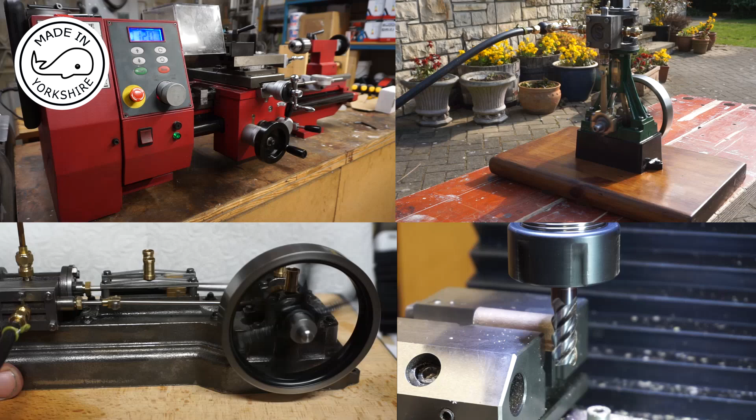Hi there, in this video I'm going to machine the flywheels for the Jerry Howell Farm Boy engine.

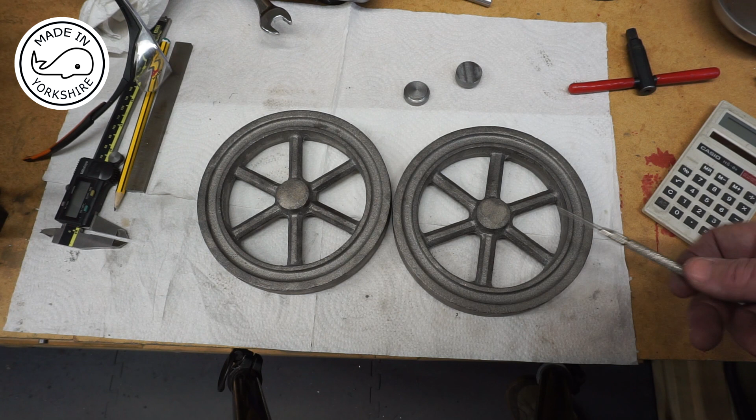The flywheel castings I got off eBay in the UK, and the seller is called Pedal56, recommended by a couple of people that follow me, so that's much appreciated. If you search eBay for Pedal56 it probably won't appear, so you've got to search for things like model engineering flywheels for steam engines, and eventually you'll find him.

These are very close to specification for the Farm Boy, and the only major difference is the hub on the Farm Boy sticks out slightly, which these castings don't. So my plan is, I've made these pieces out of mild steel, and the idea is to cut a recess and stick these in with Loctite 638, then machine them to spec.

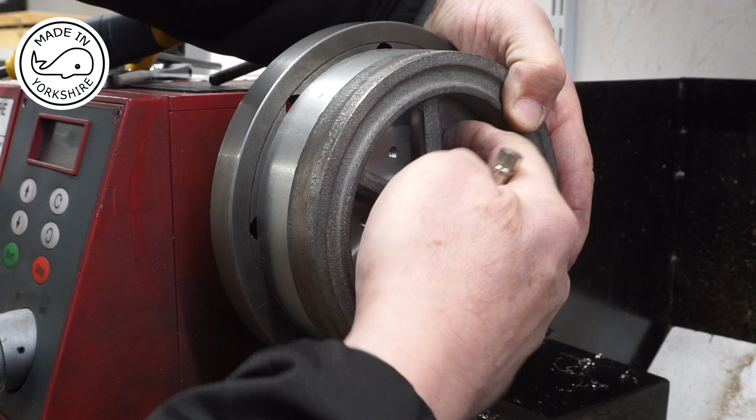I had been hoping to use this back plate to hold the flywheel, but unfortunately the holes in the back plate don't line up. So I've made this adapter plate out of aluminium and attached it to the back plate. It's running very true, and the idea will be to fix it using some kind of bolting mechanism, which will allow me to machine it.

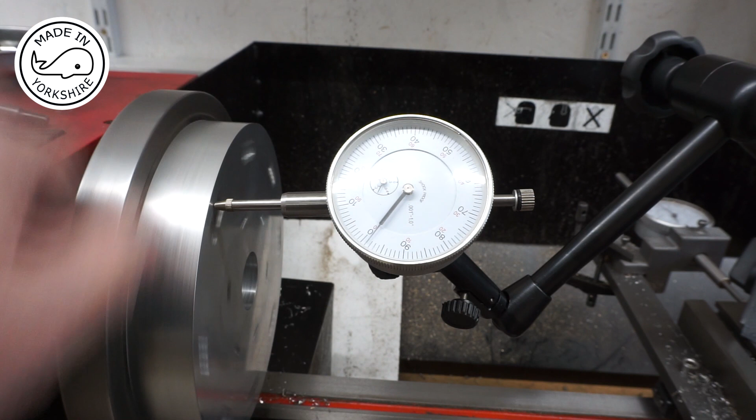Pretty close. It's about 6 thou out, but I think that'll be okay.

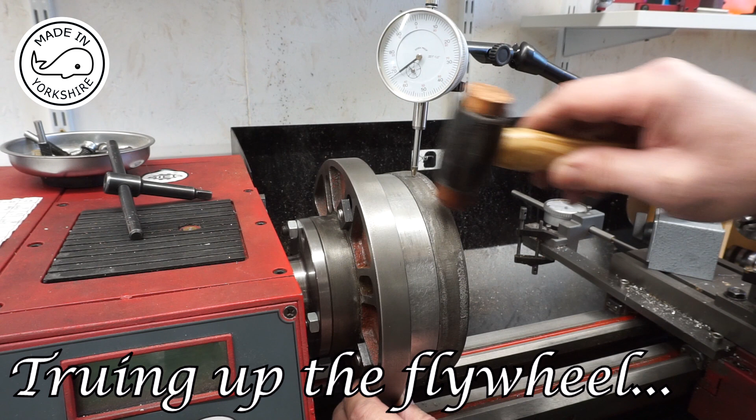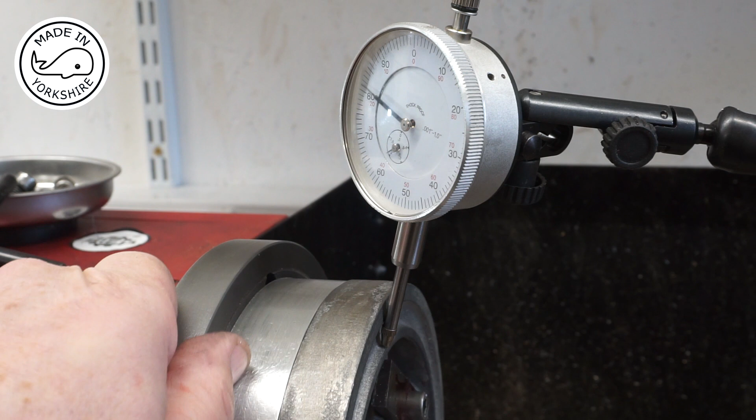I'm just checking the inside rim here. Within about 15 thou, but I think that'll be okay.

So I've set the carriage stop so I can't go beyond that. The tool will just pass the edge of the flywheel, making sure I've got clearance on these screw heads, which I have.

I'll turn at the slowest speed, in about 5 thou increments initially, see how we go. This is just running at 100 RPM, and I'm just using the manual carriage feed.

Well, this is going to take a while, but it's just a matter of being patient. I'll get back to you a bit later on. So I've just put a new tip on, and I'm running on fine feed now.

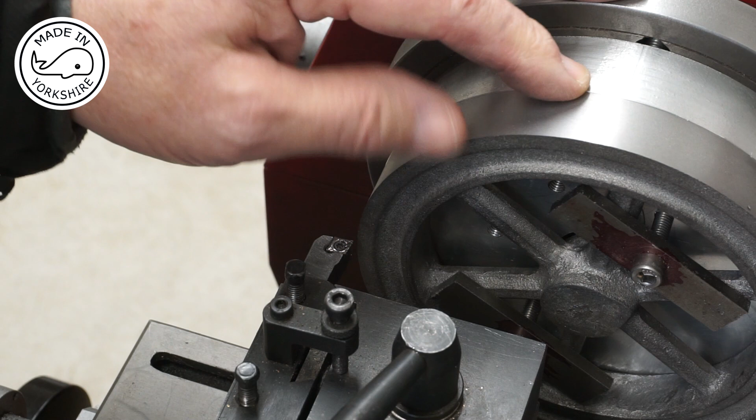The drawing says the width of this flywheel should be 0.8 of an inch, and it's already 0.79, so I'm just going to lightly skim it and get a finish on it.

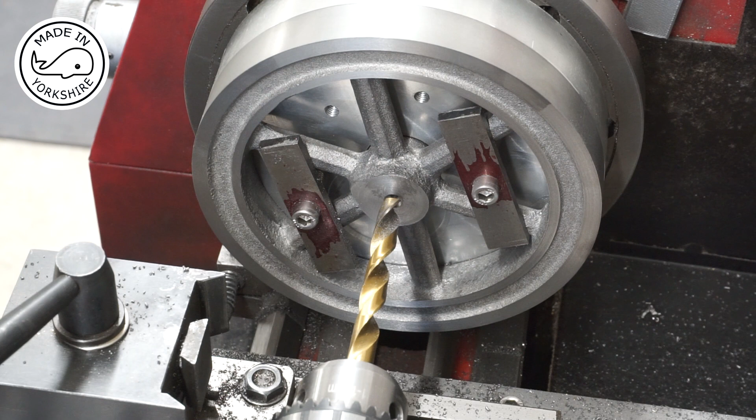So I think my priority now is to drill and ream this to 3/8 of an inch. This is a 23/64 drill bit, and I've already centre drilled.

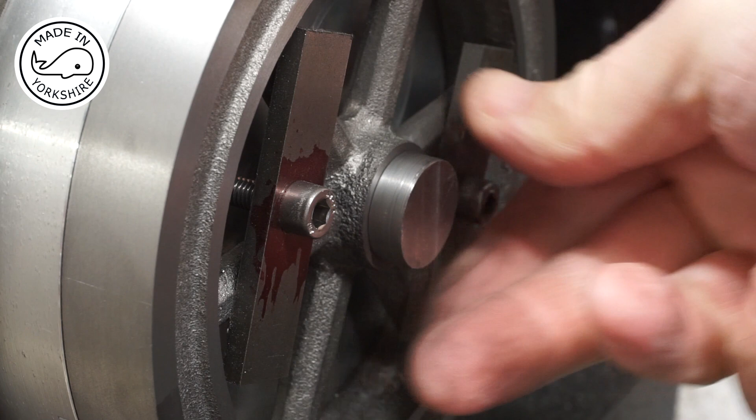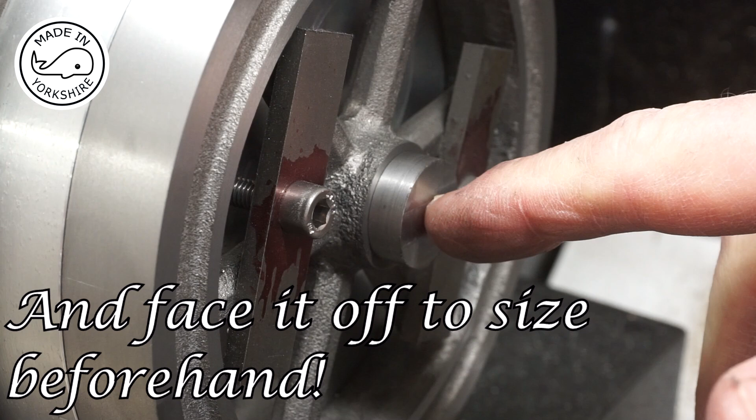Well, this seems to have turned out okay. So what I'll do is Loctite that in place, leave it for a while, and then I'll drill and ream to 3/8 of an inch again. But I'll do that bit off camera.

So all I need to do on the lathe is switch it round and face the opposite sides on these edges. Again, I'll just run this at the slowest speed.

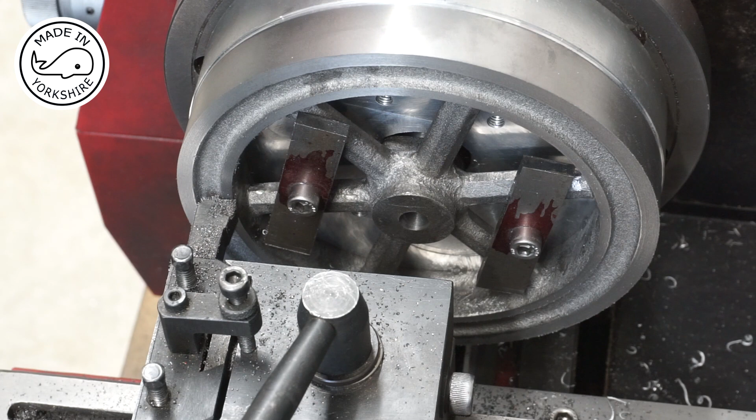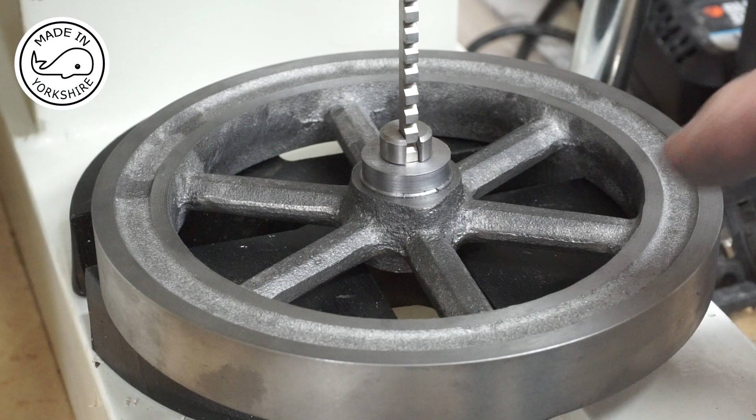Now what I did off camera on the lathe is I reduced this inner rim down by about 63 thou from the outer rim, and I thought before I put it on the rotary table on the mill I'd broach this keyway. It's 1/8 of an inch keyway, and this is the first time I've broached anything, so it should be fun.

I decided to broach it from this side because that's where the mild steel is, and if I did it from the other side it might pop that out. Maybe, I don't know, but it seems to be the safest side.

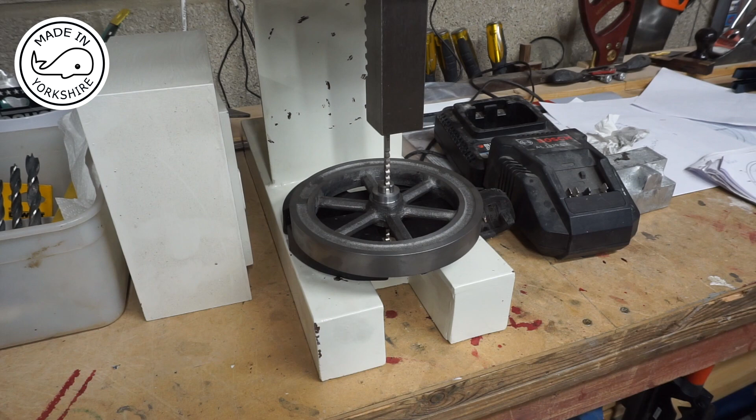Needs a bit of pressure. Just to give you an idea of the setup, it's my 2 ton press.

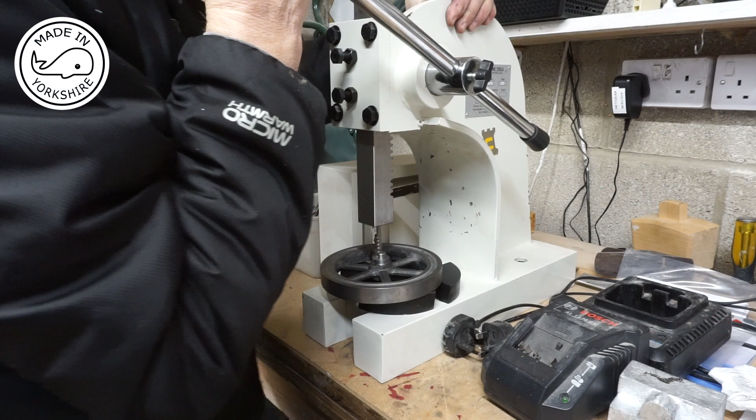Blimey. It's a bit tight. I'm going to have to move the camera, but I'll show you afterwards. Oh. Oh, my neck.

Well, that's the first pass, so I need to put a little spacer thing in the back and do it again, but I'll do that off camera. Well, that worked out okay. Happy with that.

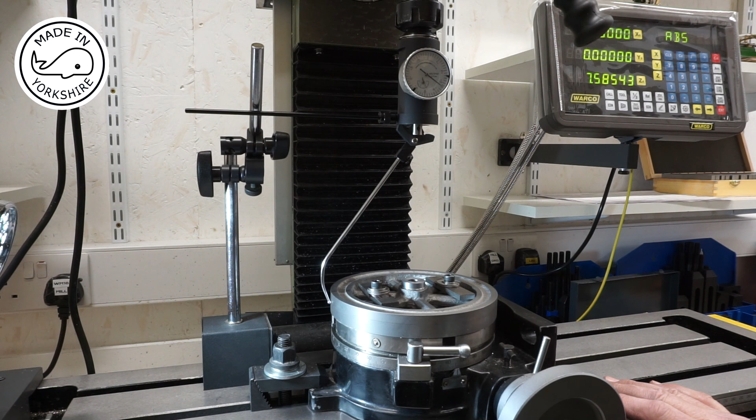Okay, so I centred the rotary table on the mill, and then I put the flywheel on the rotary table, and to get that centre I used the reamer that I used before, and it's pretty much spot on. If you look at it with this coax indicator, it's a couple of increments out, but I don't think I can get it any closer than that.

I also used an edge finder to see how close these edges were, and to me visually they look spot on. So my plan here is to use this 3/8 of an inch ball nose end mill just to clean this edge up here. It is a bit wavy, so I think if I leave it as is, it won't look right when the machine's running. So I think it's worth a try. Let's see how we get on.

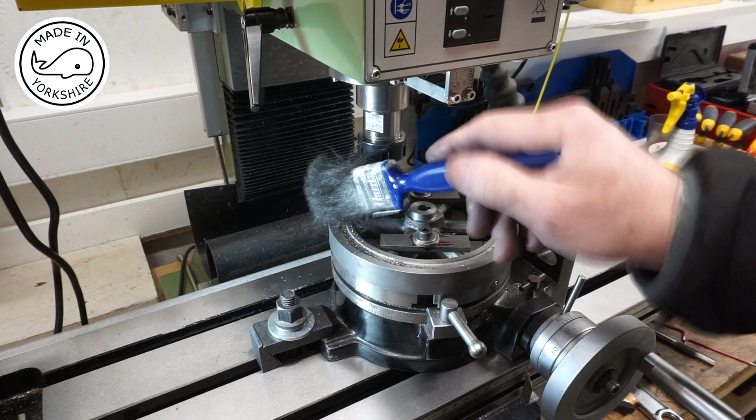Not sure about this. I think I'd be better off just using a plain end mill to do the centre bit, and then a smaller ball nose for the edges maybe. I think I'll try that.

Oh, I'm getting there slowly. So I'll carry on. I'll probably go to a depth of, I don't know, based on this outside edge, probably I'll go to maybe 100 thou. I'll do that off camera.

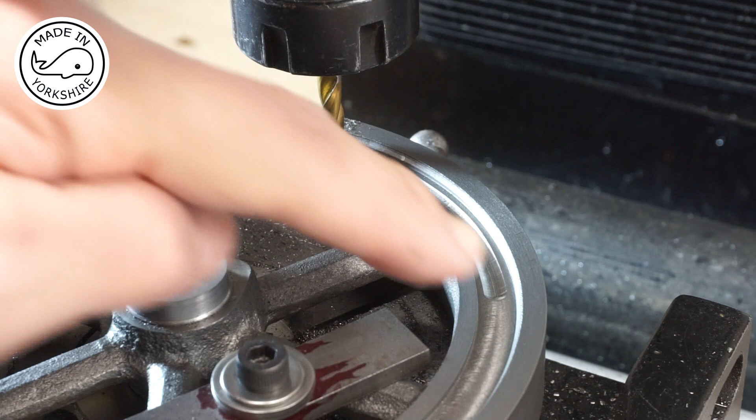So for balance, there's a need to cut a recess in here with a ball nose end mill. It's a 120-degree arc, which is opposite the keyway, and it needs to go to a depth of about 130 thou.

Well, that's turned out pretty good so far. I've left a little bit of meat on the hub, and I need to put it back on the rotary table and do similar machining on this side, but I'll do all that off camera. Once I've done that, then I need to drill and tap 3 holes and put a taper on it.

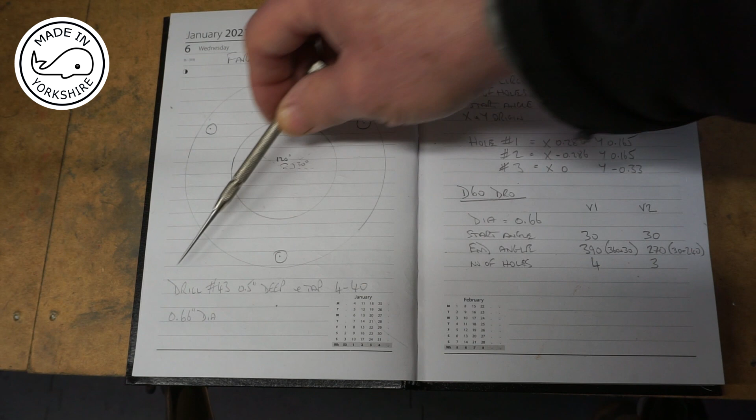So now what I need to do is to drill the bolt circle on the hub, and the plan says that you need to drill with a number 43 drill bit, 1/2 inch deep, and tap to 4-40, and the bolt circle is 0.66 of an inch in diameter.

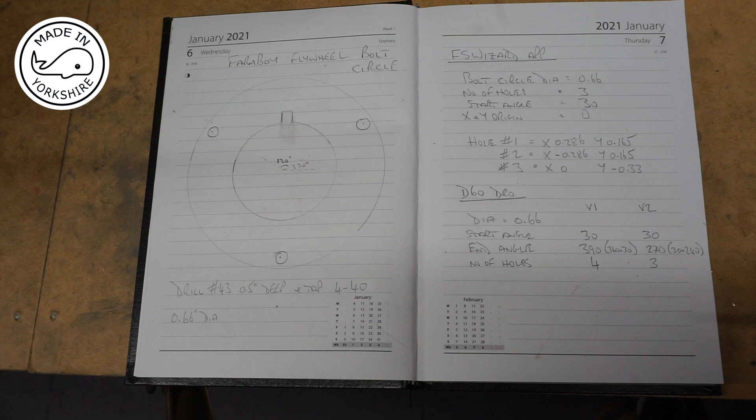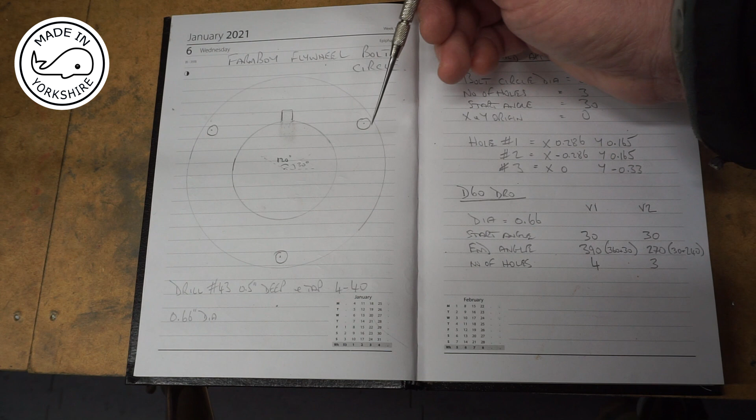Now there's a number of ways of doing this, and for those who haven't got one of these intelligent DROs, you can use an app on your phone called FS Wizard, and you just type in the bolt circle diameter 0.66, number of holes 3, start angle 30. The start angle 30 is this angle here. I know that there's 3 holes, 3 divided into 360 is 120, so I know that this angle here is 30 degrees. So you type in 30. The X and Y origin is 0, that's the centre point, and it comes up with that as an answer.

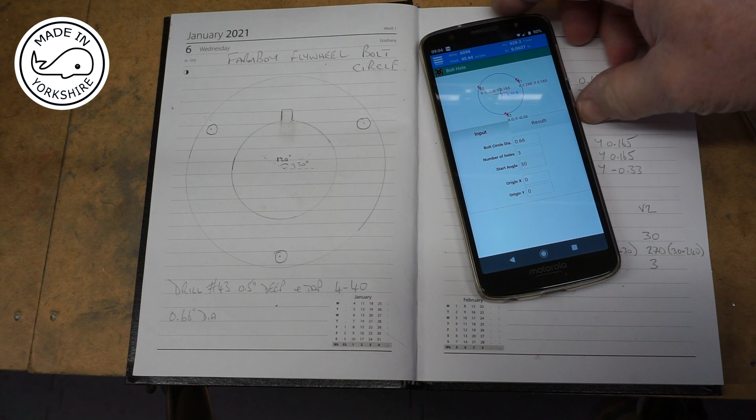And that's it on the phone - really good little app on the phone is this. It's got loads of functions on it.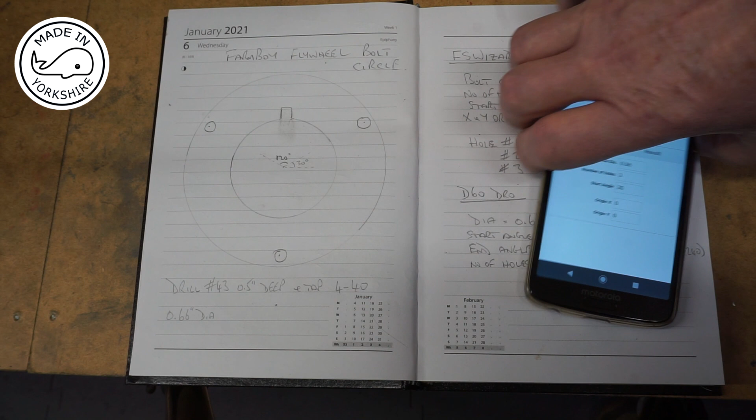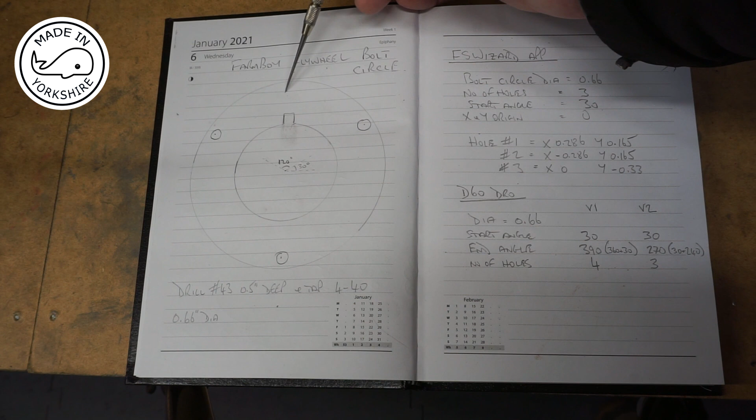Now another approach is if you've got a DRO that's got a bolt circle function on it, you can type in the parameters. The example in my book that came with the DRO is pretty useless really, because it only gives an example of a hole starting at the top, so the starting angle of 0.

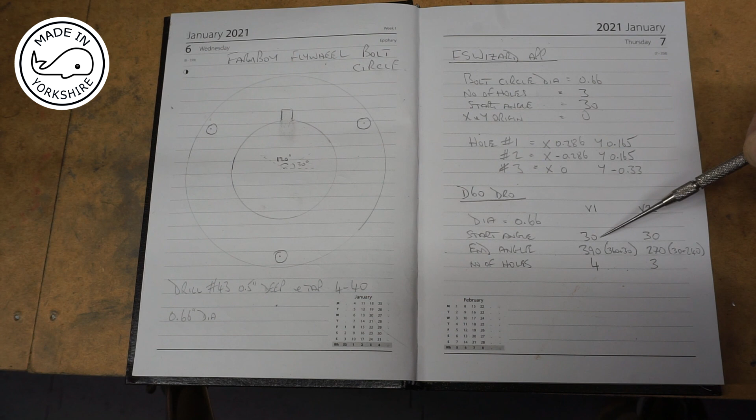But anyway, there's a couple of ways of doing it on my DRO. Option 1 is you put in a diameter of 0.66, a start angle of 30, and an end angle of 390, so that's 360 plus 30. And you say the number of holes is 4.

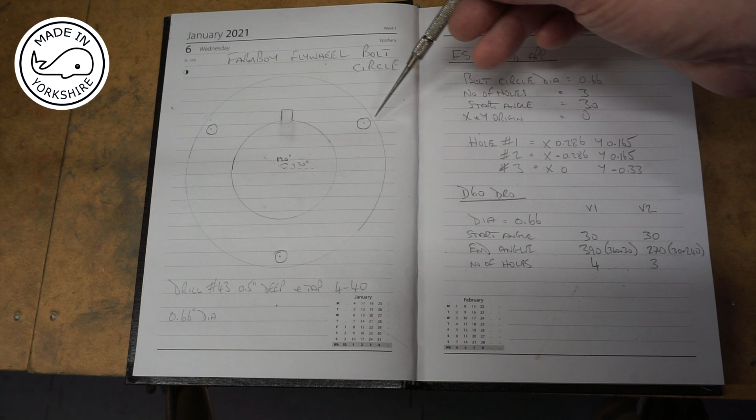So the way this will work is it will, I don't know which way around it goes, but it probably goes that one, and that one. So your start angle is 30, and then basically you're saying you're going to end at that point, so to end at that point you need 4 holes.

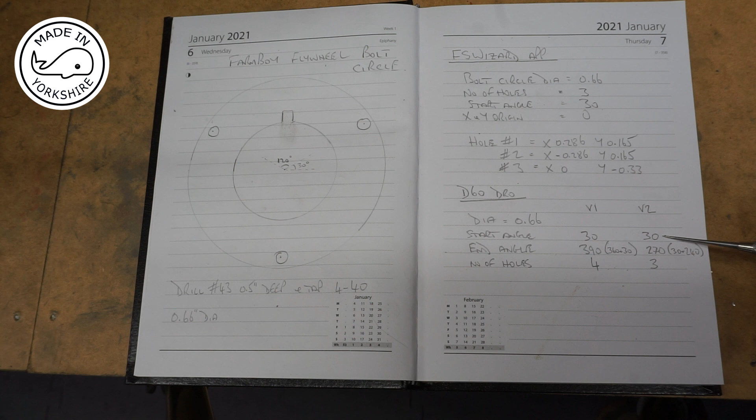The other option is to put in these parameters: start angle of 30, end angle of 270. So that's your 30 degrees plus 240, so you got 120 there and 120 there, and the number of holes is 3. Both of these options produce exactly the same result.

So on my DRO, I go for the bolt circle option. Comes with PCD XY, yes, it's that plane I'm looking at, so I just press enter. Centre position is 0s, enter. The diameter is 0.66, enter.

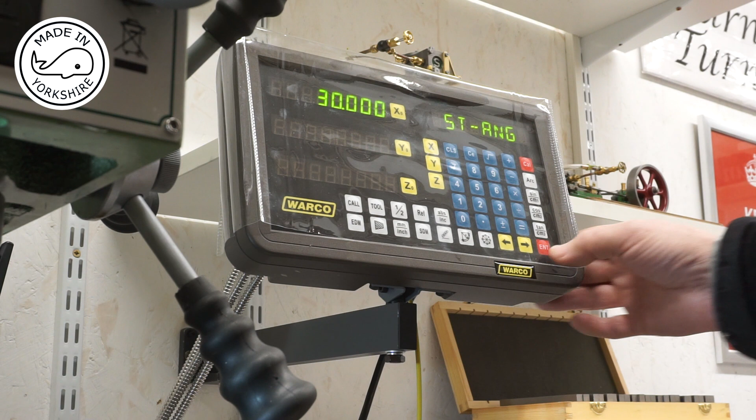My starting angle is 30. My end angle is 390 because I'm going for the 4 hole option. Number of holes 4. And it gives me the position of the first hole to go for, so I just need to move the table to that position.

Lock it. And lock it.

So all I need to do is to centre drill, drill and tap 4-40, and then once I've done that I can move on to my next hole.

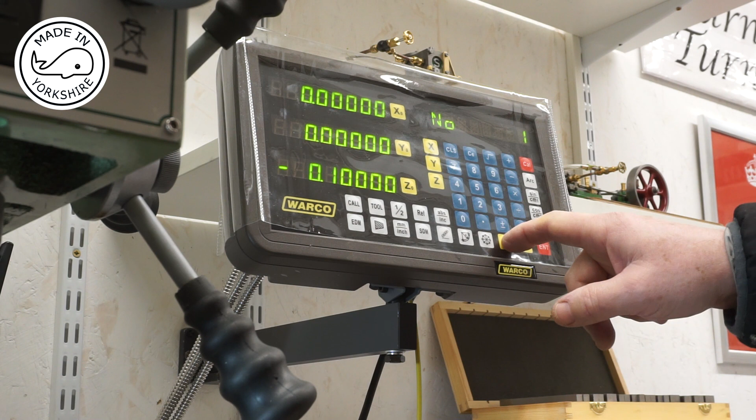So I press that, this gives me hole number 2, which is on the y-axis the same position, and the x-axis needs to be moved to the other side.

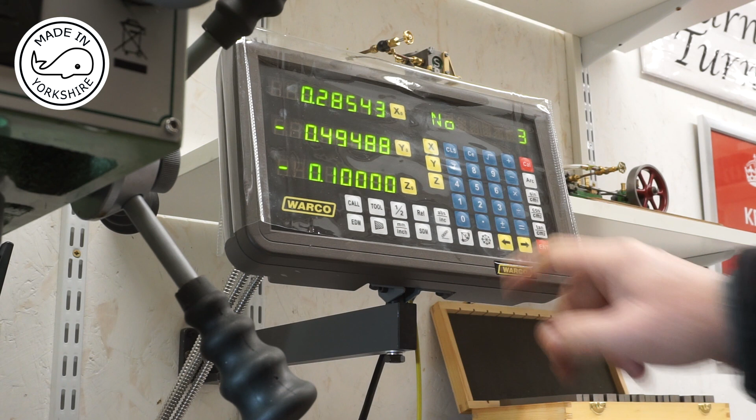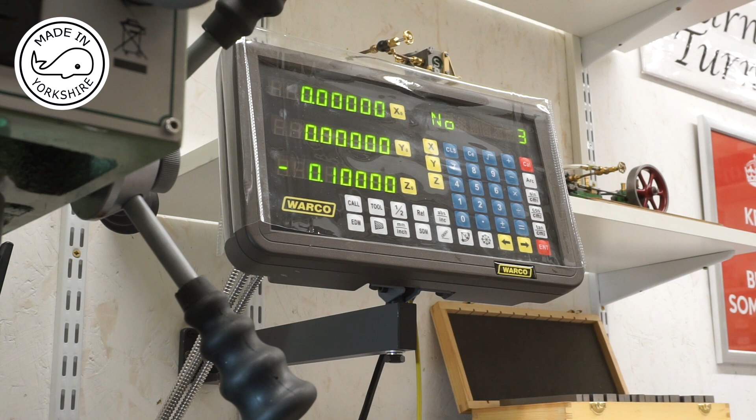So that's my second hole to be drilled and tapped, and my third hole - this goes to 0 I think - and if you look at that there, you can see that the third hole is right at the bottom there.

So I'll do the drilling and tapping off camera. Well, that was pretty straightforward.

So the last operation is to cut a 6-degree taper on the inside of that. So I'm going to cut the taper on the lathe, and it's pretty much on centre.

This gauge holder is fantastic, it's a Mitutoyo one, and you just have one screw adjustment. Highly recommend that, saves a lot of hassle.

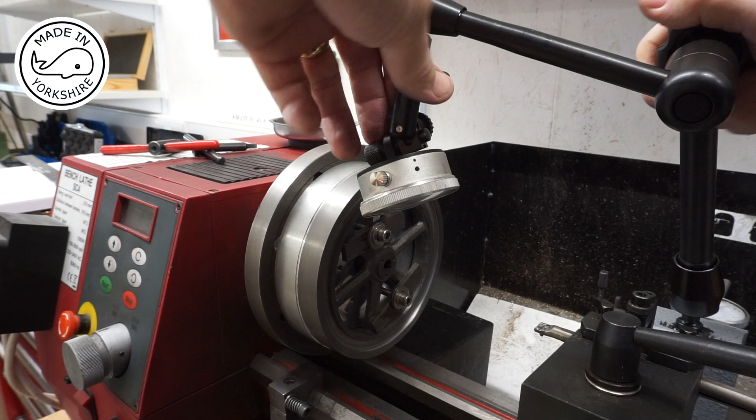Well, I've adjusted the compound slide to around about 6 degrees, and to check it, I thought what I'd do is just put a bar in here and touch the tool on the edge of the bar, and then I'm going to wind the compound slide back.

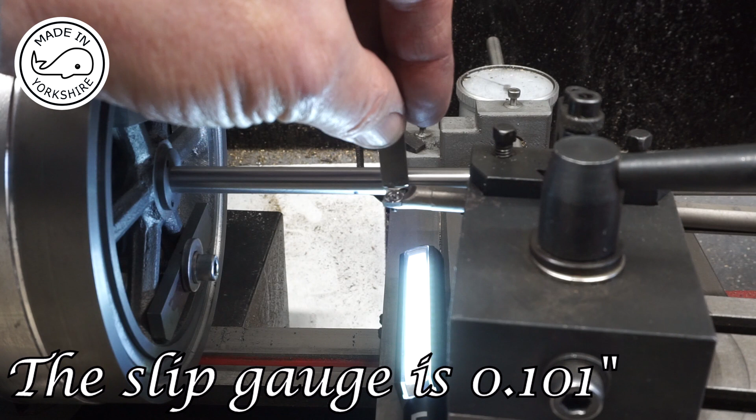I've done this already, and I can get this slip gauge in once it's moved back by 24.8 millimeters, which equals 0.9764 of an inch. So I can then work out what the angle is using sine, and it comes in at 5.93 of a degree, so I'm happy with that. So I need to cut this taper until the outside diameter is 0.55 of an inch.

Well, this little engine is coming close to completion, and there's only 2 items I think now outstanding. Well, 3 actually, because I need to make another one of these. But the other 2 are the fuel tank and the ignition. So I'm getting very, very close.